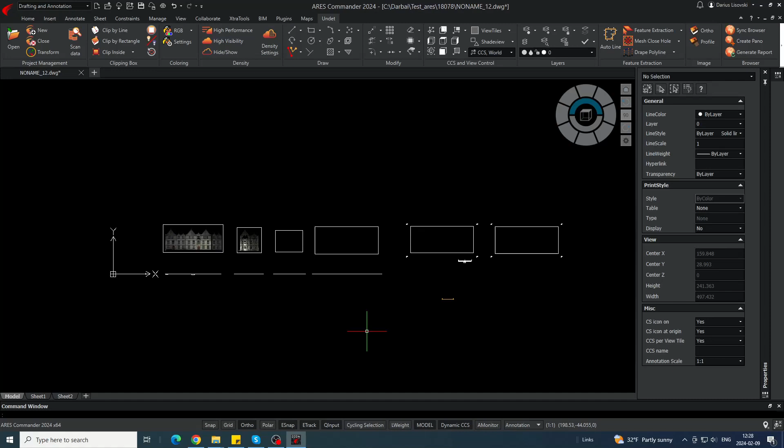In previous videos, we created orthophotos and copied them into one place. In this video, we will try to annotate them.

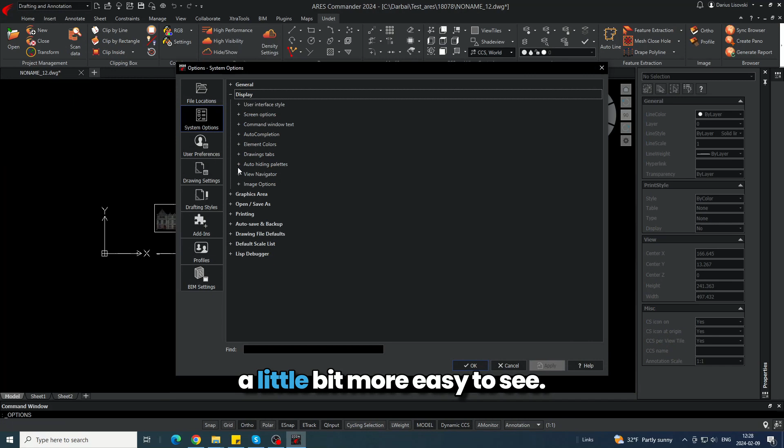First of all, we have orthophotos and we have the datum line. Let's change our screen options to make it a little easier to see element colors and the model background. We can make it a bit brighter, then a bit gray. Now we can see much more clearly.

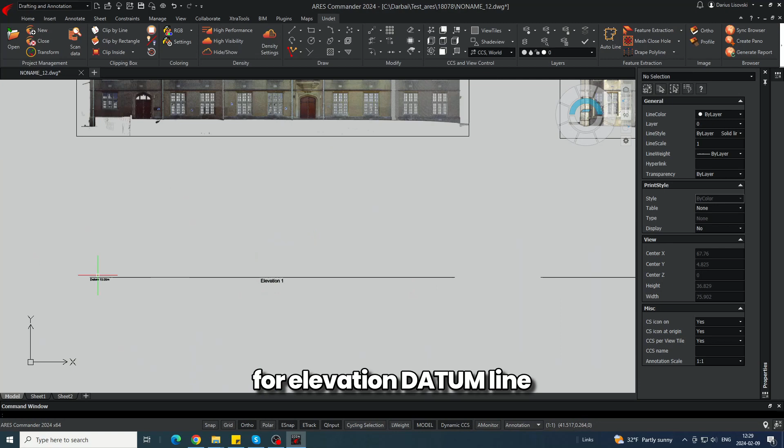I have copied some blocks that we will use for elevation for the datum line. Let's see, it's a little too low. Let's make it more up. Let's move them up a little bit.

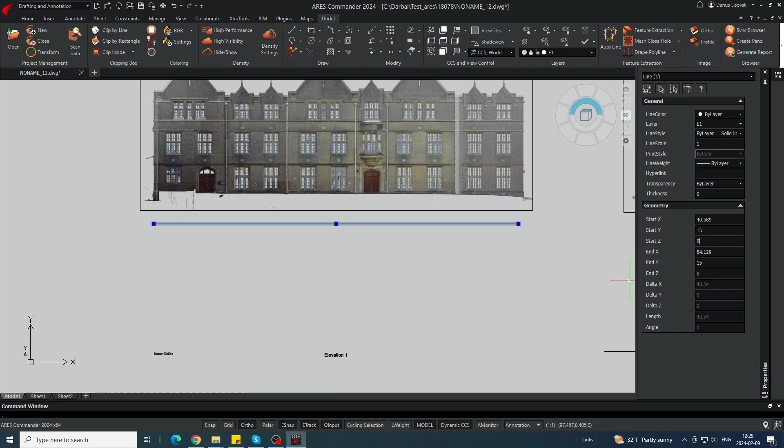With polyline, we explode and get a line. So Y is currently 0. Let's set it to be 15. So we can move by 15 up and right.

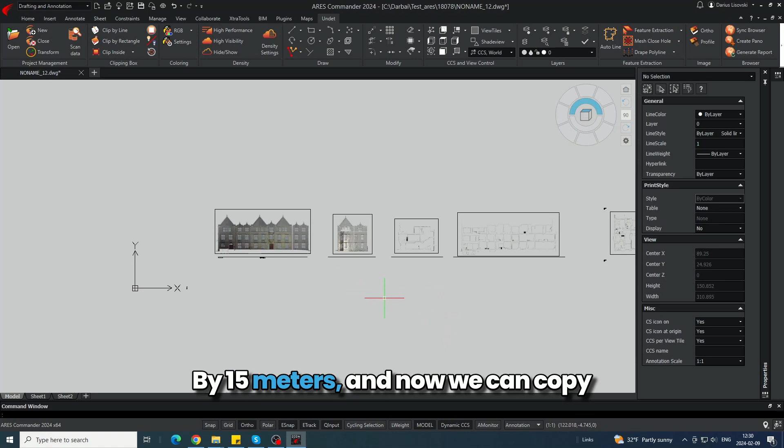The datum line is at 15 meters of elevation, so we can copy this text into another elevation. Of course, those lines should also be moved up by 15 meters. Now we can copy those texts, elevation 2, section 1, section 2. Copy also this text, that the datum is at that place, that height. For the elevation section, it's okay.

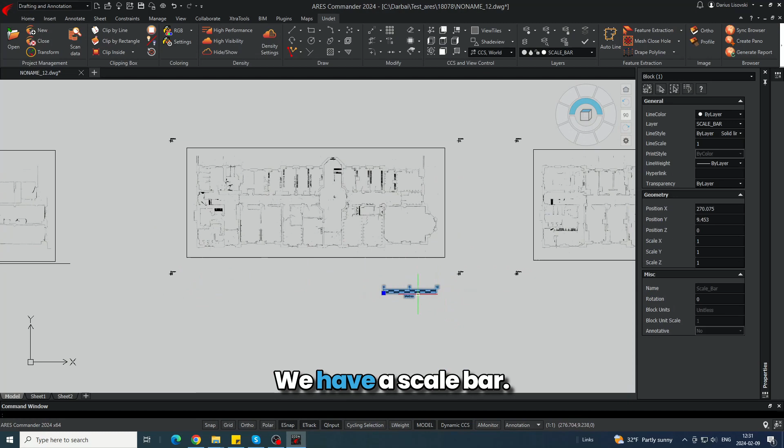For plan views, we have fit marks, we have a scale bar. We can copy it by using a reference point in our fit mark. We do need to have a section, the places of sections where sections are cut.

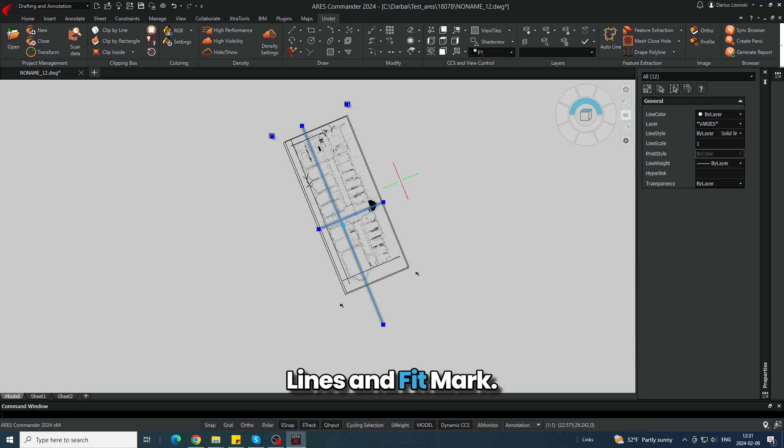So can we switch into P1 CCS and copy those lines and fit mark? Let's press copy and go into world coordinates. They are pasted. Now we can copy the same with the use of the fit mark reference to one place.

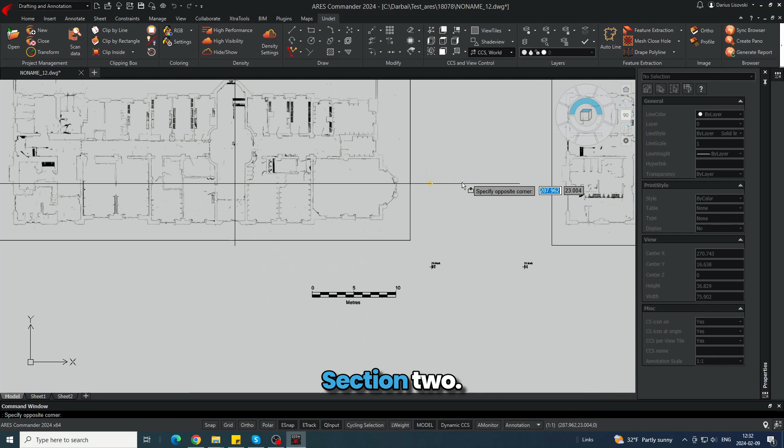We don't need it. Let's make it more pretty by copying some signs. Then this is section 2. I'm thinking of the appropriate layer. This is 2 and 2.

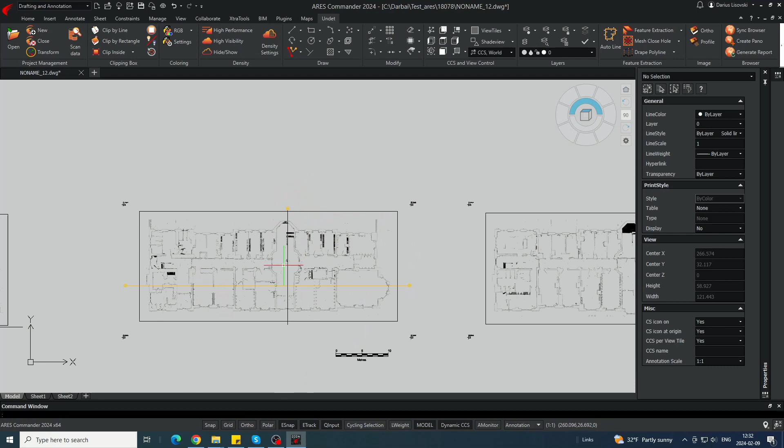For section 1 also, and we can use this, rotate it, and copy each element into the appropriate place. Here also, create move 1, and match it to the exact layer.

Okay, the place of sections is defined, and we can copy those lines into another floor plan, the same with the use of the fix mark reference here.

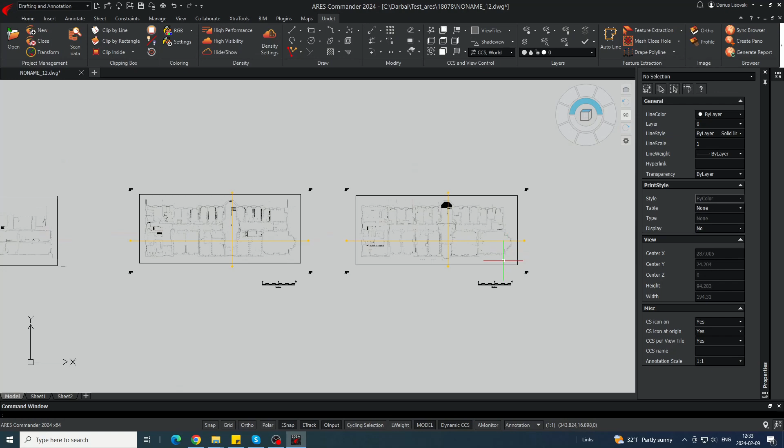So, floor plan. Okay, let's write their names: this is the ground floor plan, and another one is the first floor plan.

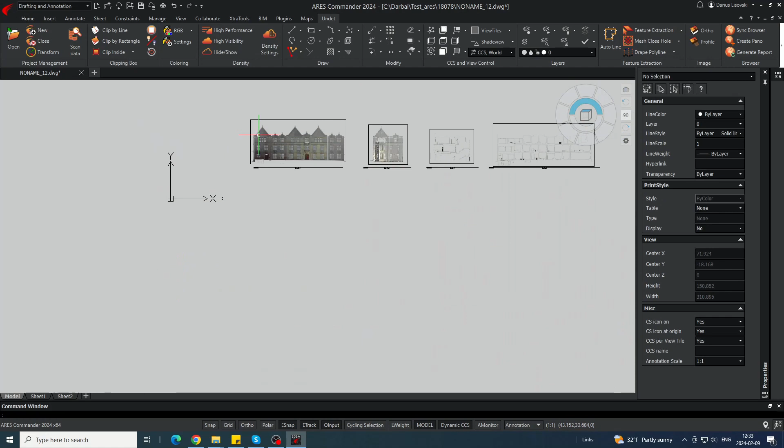For now, the next step is to set annotations of height in elevation. Let's try to do this, in elevation and in section.

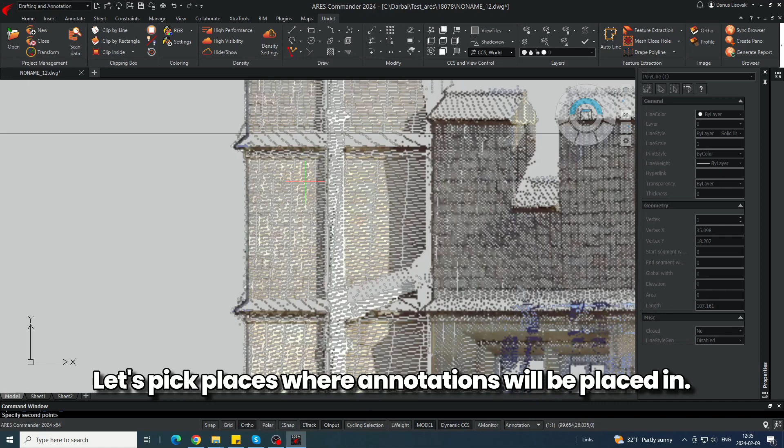First, you can draw reference lines to have the exact place of annotation. Let's try to make it for one elevation, for example. Let's pick the places where annotations will be placed, right here, and just pick those annotate signs, annotate blocks.

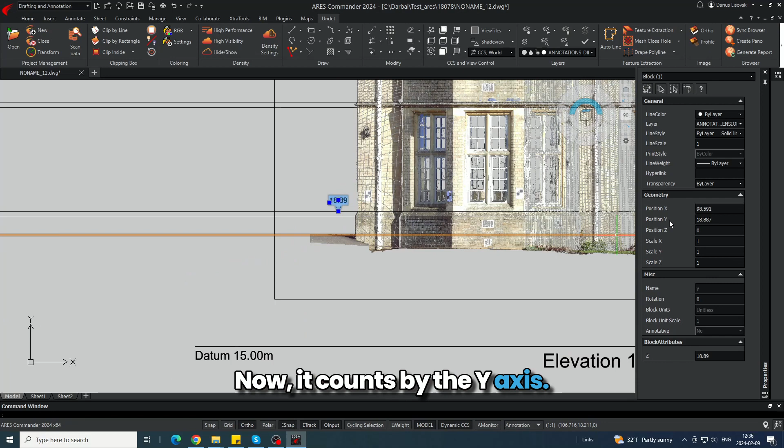Let's change our snapping settings. We need the nearest place, nearest snap. Now it counts by Y from 15 to this, which is about 3 and 8 meters, so it's 18 and 9. So everything is good, we just need to copy, and the block will change itself.

We need a mirror. We can mirror it and place it upwards. Those lines I don't need anymore. I can refresh it. This is how it's done.

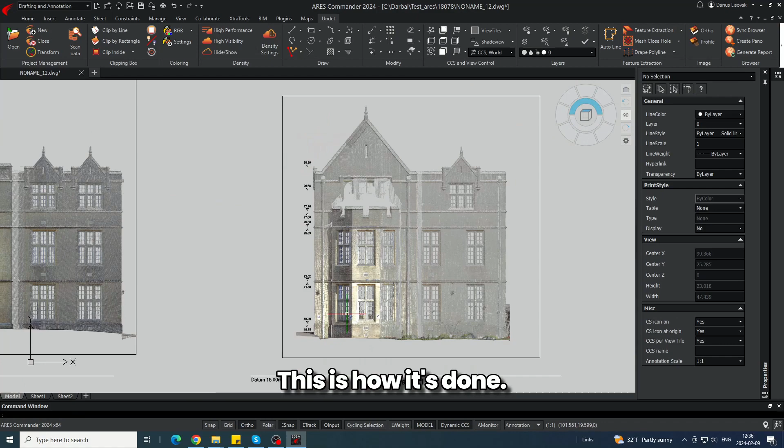In elevation view and in section view, you can do it without drawing lines, just simply by picking and copying it into the right place. You can mirror it and copy it up to the lower side, and it automatically refreshes.

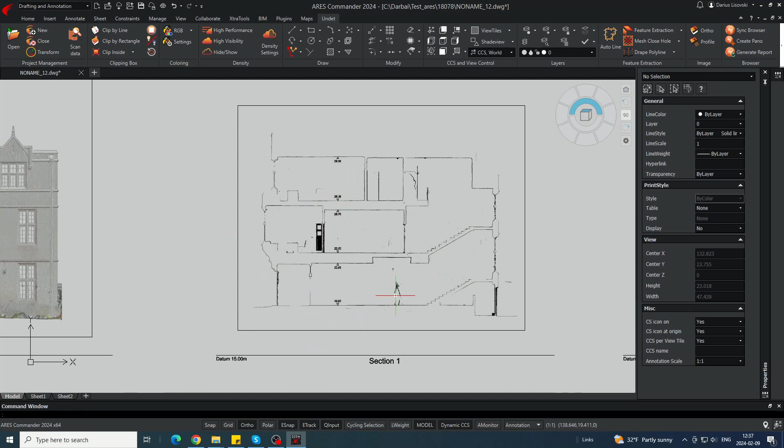It's up to you how to use this annotation. The principle is understandable, so just copy and place into the right place here, and that ceiling also, and so on. It's quite easy. Same with plans.

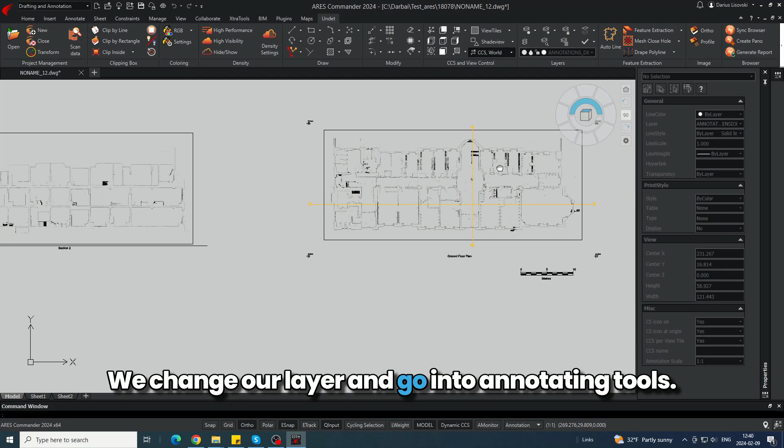We change our layer and go into the annotate tool, pick our dimension style which we will use, and let's try to annotate some part of our plan.

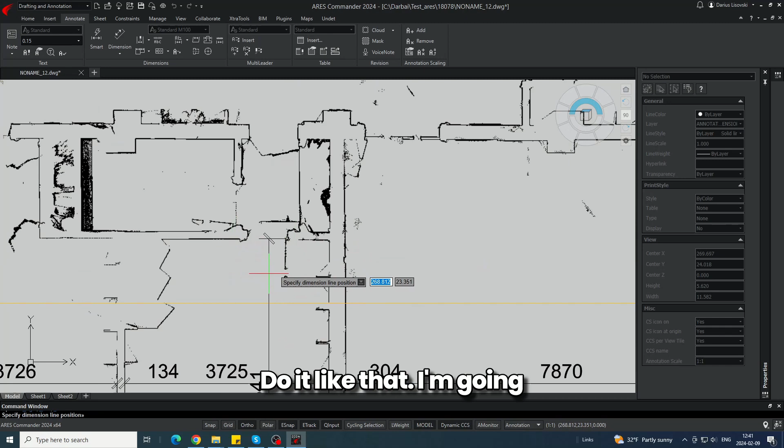We can press continue and just pick our places where we need to annotate, and the annotation will remain. Same here, for example, do it like that and continue picking just the lines. Quite easy and understandable. This is how we can annotate those drawings at the right place without any big mistake.